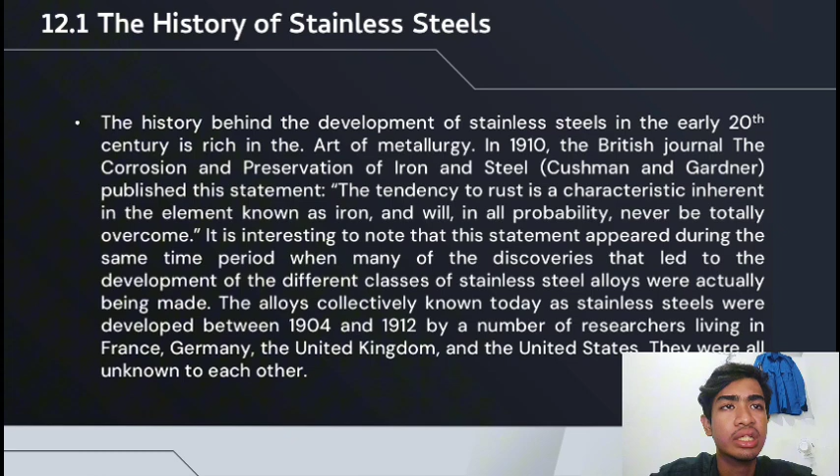12.2 Modern alloys. Many new stainless steel compositions have been invented and commercialized over the years since the initial discoveries of the alloys were made. One of the reasons for the popularity of stainless steels, in addition to their corrosion-resistant properties, is their versatility in processing and application.

With some restrictions, stainless steels can be shaped and fabricated by conventional processes such as casting, rolling, and forging. They can also be fabricated using standard powder metallurgy practice. Wrought stainless steel can be drawn, bent, formed, extruded, or spun. They can be machined and ground, and they can be joined using standard soldering, brazing, and welding practice.

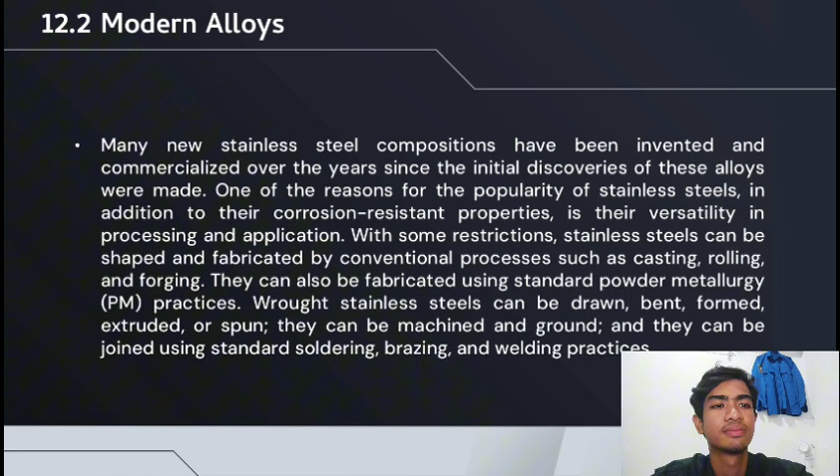12.3 Austenitic stainless steel. Austenitic stainless alloys are among the most common grades of stainless steel. They are classified with AISI 200 or 300 series designations. The 300 series grades are chromium-nickel alloys, and the 200 series represent a set of compositions in which manganese and/or nitrogen replace some of the nickel.

The properties of the 200 series grades may differ appreciably from those of the 300 series, with higher strengths being the most significant difference. In general, the austenitic grades have very high corrosion resistance, excellent cryogenic properties, and good high temperature strength. They possess a face-centered cubic microstructure that is non-magnetic, and they can be easily welded.

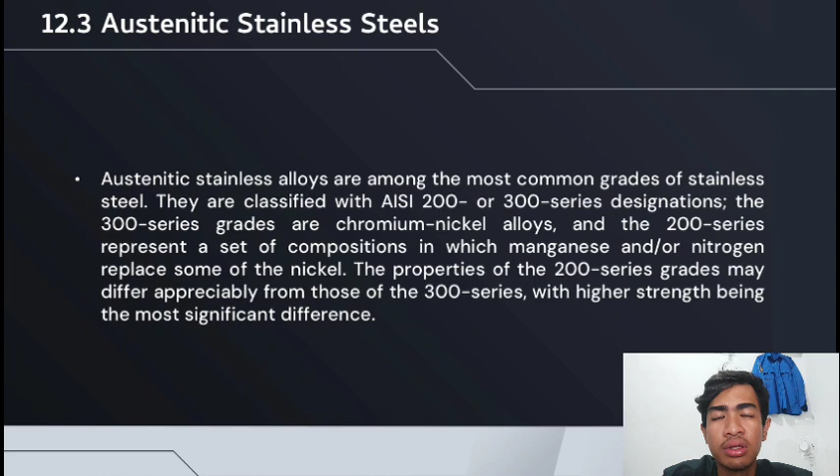They generally contain between 16 and 25% Cr, and can also contain nitrogen in solution, both of which contribute to their relatively high corrosion resistance. They can be easily formed with the same tooling used to process carbon steel, but they can also be made incredibly strong through cold work, achieving yield strengths of over 2000 MPa.

12.4 Ferritic stainless steel. Ferritic stainless steels are relatively low carbon iron-chromium alloys classified with AISI 400 series designations. They are generally grouped into low, medium, and high chromium content, with some notable exceptions. They are generally not alloyed with either nickel or nitrogen.

Ferritic stainless steels have relatively poor high temperature strength and exhibit limited toughness at low temperature and in large section thickness. In general, their corrosion resistance is substantially lower than the austenitic stainless steels, but higher than most of the martensitic grades.

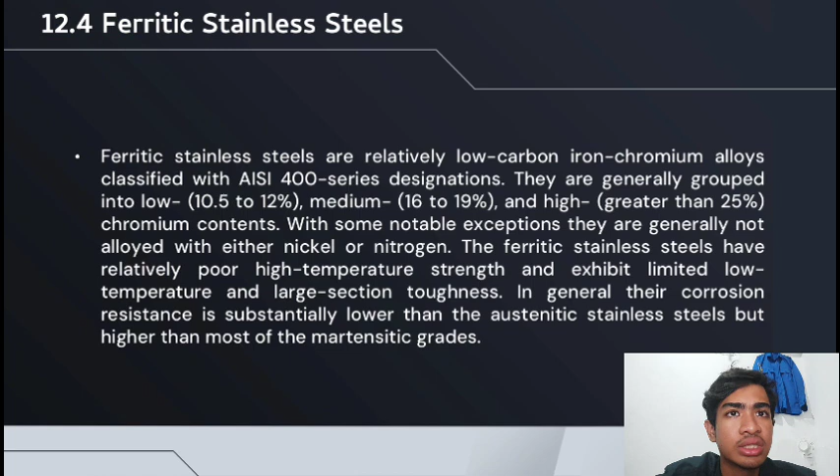During the early 20th century, the methods of steel production that were in use at the time were not capable of sufficiently reducing the carbon content of steel to the levels required by many of today's standards for stainless steel. So additional chromium was used to absorb this extra carbon to produce stainless alloys.

12.5 Duplex stainless steel. Duplex stainless alloys consist of two phases at room temperature, austenite and ferrite.

The duplex stainless steel can generally be regarded as chromium molybdenum ferritic stainless steel with sufficient nickel to create a balance of ferrite and austenite at room temperature. The duplex stainless steels were originally developed in the 1920s, but did not gain popularity until recently due to an increased need for stainless steel with improved strength and better resistance to chloride induced SCC.

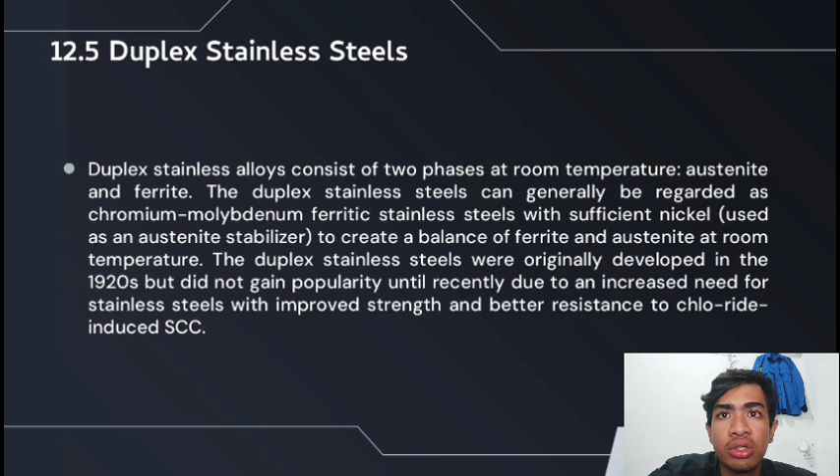These alloys possess characteristics of both ferritic and austenitic grades. Their corrosion resistance is similar to their austenitic counterparts, but their stress corrosion resistance, tensile strength, and yield strength are generally superior to that of the austenitic grades. Toughness and ductility generally fall between those of the austenitic and ferritic grades.

12.6 Martensitic stainless steel. Martensitic stainless steel alloys are Fe-Cr-C alloys that are ferromagnetic, and unlike the other grades of stainless steel, they can be hardened through heat treatment in the same manner as non-stainless carbon and low alloy steels. They are somewhat confusingly classified along with the ferritic stainless grades in the AISI 400 series designation.

The chromium and carbon content are balanced to ensure the formation of the martensitic microstructure upon heat treatment. They can also be thermally treated by annealing, stress relieving, and tempering. Grades with less than approximately 0.40% C can be surface hardened by heat treating.

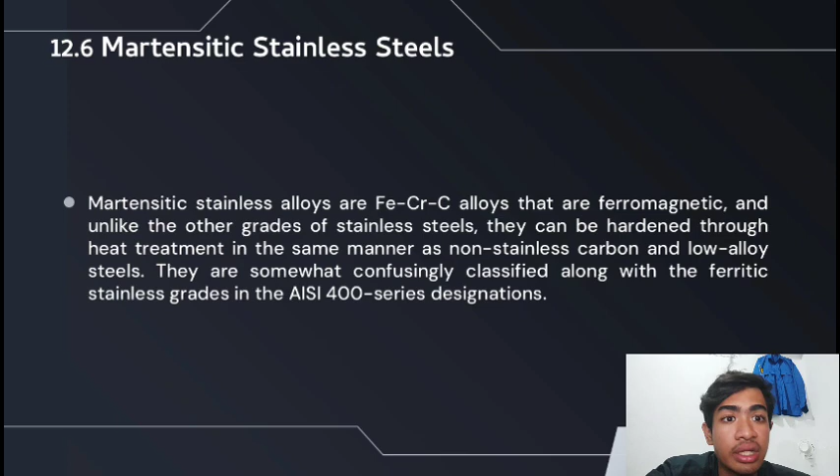12.7 Precipitation hardening stainless steel. Precipitation hardening or PH stainless alloys are designated by the AISI 600 series and also by non-standard proprietary compositions. However, the UNS designations and the proprietary names of these alloys are often used with greater frequency than the AISI designation. Of all the available stainless grades, they generally offer the greatest combination of high strength coupled with excellent toughness and corrosion resistance.

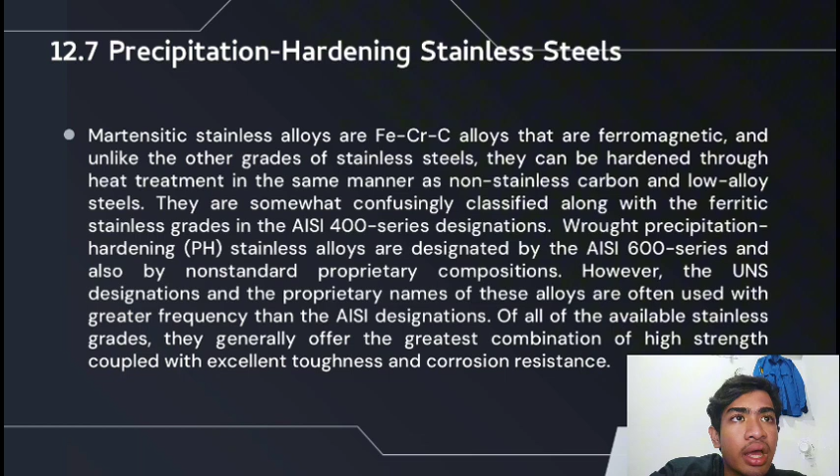The PH grades were developed at the beginning of World War II, and unlike the other families of stainless steel, these alloys are grouped as a result of their heat treat response instead of their microstructural characteristics. They develop their high strength and toughness through additions of aluminum, titanium, niobium, vanadium, and/or nitrogen, which form coherent intermetallic precipitates during a heat treatment process referred to as age hardening.

12.8 Cast stainless steel. In general, the cast and wrought stainless steels possess equivalent resistance to corrosive media, and they are frequently used in conjunction with each other. Important differences do exist, however, between some cast stainless steels and their wrought counterparts. One significant difference is in the microstructure of cast austenitic stainless steel. There is often a relatively small amount of ferrite present in austenitic stainless steel castings.

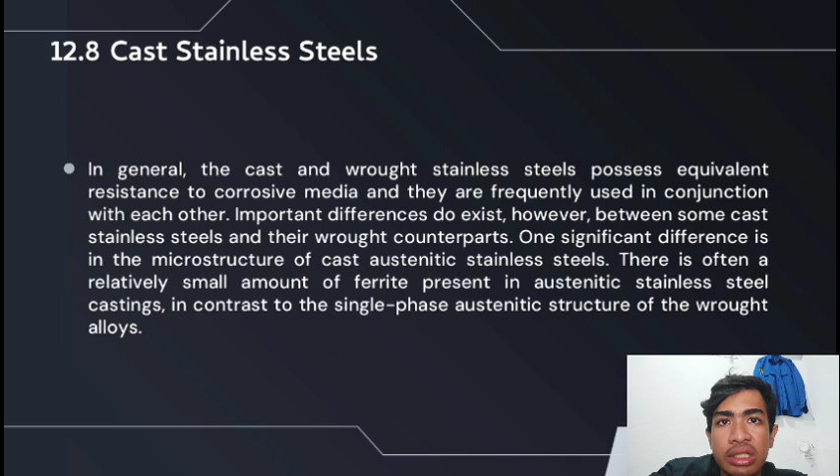In contrast to the single-phase austenitic structure of the wrought alloys, the presence of ferrite in the castings is desirable for facilitating weld repair, but the presence of the ferrite also increases resistance to SCC. There have been fewer failures with cast stainless steel in comparison to approximately equivalent wrought compositions.